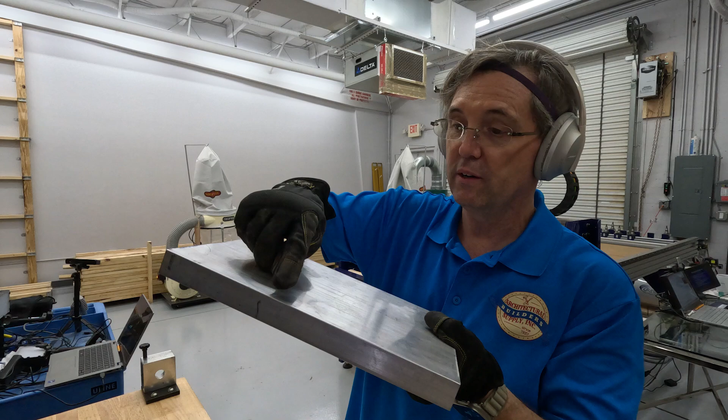I said, well, I can make it for you on the CNC machine. He says, yeah, send me a quote. So, needless to say, we got the job. I'm going to turn this 1-inch solid block of 6061, 8-inch by 12-inch, into 4 individual pull handles, and that's what this video is about. I hope you'll watch as we go through the journey. Unscripted drama is guaranteed. Success, not so much, but fingers crossed. Let's move on.

Okay, let's tap some holes here. This is a 1/4-20 tap specifically for aluminum.

Yeah, tapping holes is... you know what? Obviously I could have put this tap into the drill press, but I've never done that before, and I'm not comfortable. I don't see how that would work with a bottoming operation.

A little bit of resistance there, so I'm going to back it off, clear out the holes. Yeah, chips get in there, you'll be able to tell that something's not progressing the way you like. You get any twist at all, it's definitely time to go in the opposite direction and work something free. Twist is the danger zone. A very small amount of twist is going to occur, but going back and forth like I just was doing is how you don't break a tap off.

Plus, what is easy about soft material like aluminum or brass is, I've drilled and tapped so many holes into the back of mortise cylinders, brass mortise cylinders. The tap is fine. I don't know how many... yeah, we're good, we're at the bottom. I don't know how many holes ultimately I'd be able to get through with a single tap. It's probably a fairly large number.

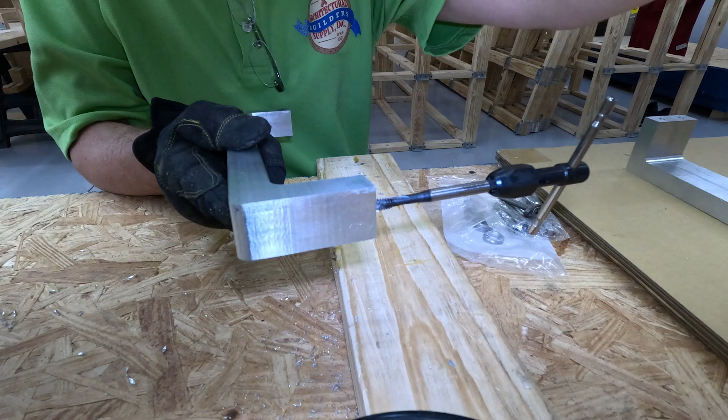Bit of resistance, back it off.

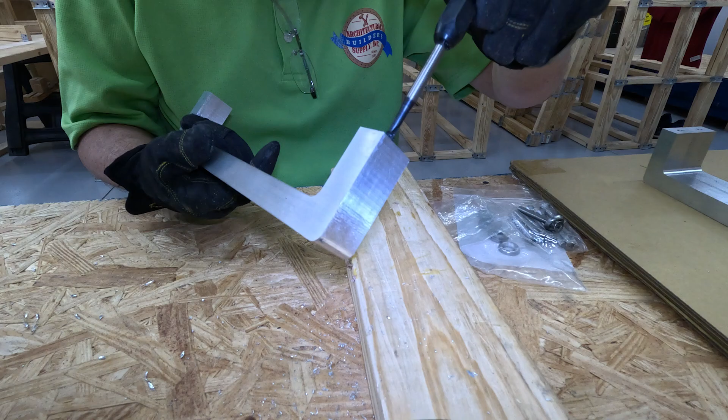Maybe what I'll do in the future is use specialty bolts, but I'll do 1/4-20, maybe a finer thread. That may be a good idea for this. I could have done 5/16 on this. 3/8 probably would have been stretching it, but we could do 5/16.

No resistance, so I'm just... well, a small amount of resistance. No twist, so I just kept going.

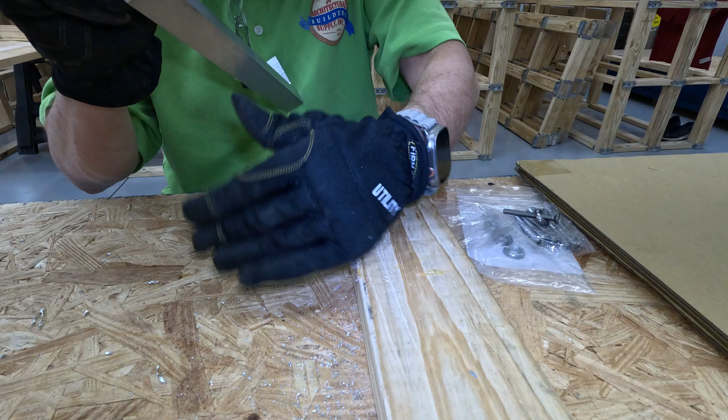He has a couple of GT40s, a Mark 1 and a Mark 2. When I was there about a month ago, there was a third, I think it was a Mark 3, I don't recall. It was on loan from someone.

He has an incredible collection of hood ornaments. Cars in the 20s and 30s, a hood ornament was quite the thing. The French glassmaker Lalique, some of you may have a Lalique in your home, I know we do, manufactured some pretty exquisite glass hood ornaments.

That's interesting, if you do end up here in Naples, it's definitely one of those things that doesn't make the list of things to see for a lot of people. I think Revs Institute is what it's called. It's just like the hardware industry, we're awful at marketing. I lived here for 3 years before I learned that there was a near priceless car collection a mile to the west of where I sit at a desk for 9 hours a day.

I've been there 3 times. One was a docent-led tour. I absolutely suggest that you do it with a docent. The people that work there have forgotten more about automobiles than most people will ever learn, and they are volunteers, extremely passionate about automobiles, and it shows. They know stuff and they are really happy to share their knowledge. They're also really quick to tell you don't touch anything, as would be common sense.

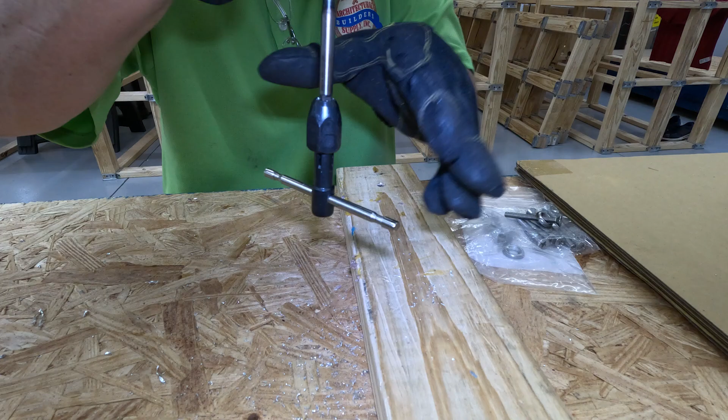There's a gift shop and back of house tours. Every vehicle in the place gets what they call exercised at least once a year. The race cars are actually put onto a track with professional race car drivers, so this material is actually put through its paces.

Okay, we have one more hole to go.

Then what will happen is this video will end, and the final videos are going to be just me drilling the 5/16 holes in the aluminum push plates that these pull handles are going to sit over and on top of. Really good there.

This combination of drill bit and tap will be kept on record, so making these in the future will absolutely be done with the use of this combination of drill bit and tap. I'm really happy with the performance, the quality of the finish.

And as I've said earlier, oh, getting some resistance there. It's always the last one that I have to be mindful of. Overconfidence is not... okay, that definitely cleared itself out. Overconfidence is what causes trouble.

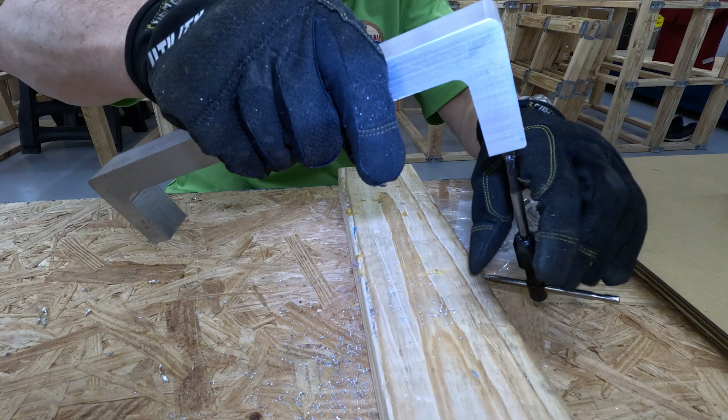You can see that blue finish on the end of the pull there. That's just going to stay there. I'm sure I've mentioned it, but these handles are just... these pull handles are just meant to be props. So there we go, we're done.

Let's pick it up with the push plates.

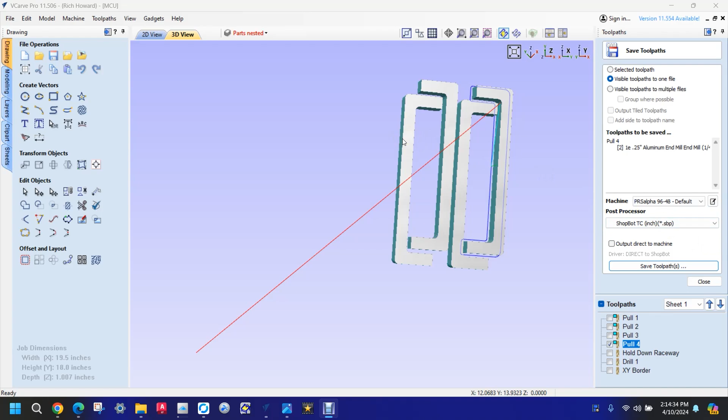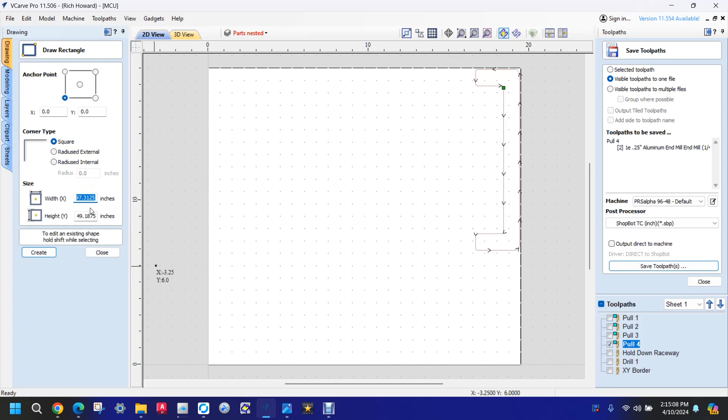Let's do that. Okay, so let's get the push plates drawn. These are 4x16 push plates, so I'm going to... what size, material? 19, okay, lower left, okay really good. So I'm going to draw a rectangle. I'm going to start in the lower left. I'm going to make my width 4, my height 16, and I'm going to create.

There it is. I am going to draw 2 circles. Center point at X2 and Y3 with a diameter of 5/16. Create. And then I'm going to put another one at 13. Create. Bingo. Close. All right, let's select all this and let's move to a layer, a new layer.

Let's call it plates. Okay, go up here. Here we go. Okay, so I drew the background, the plate itself, just for reference. That's not going to end up being a vector.

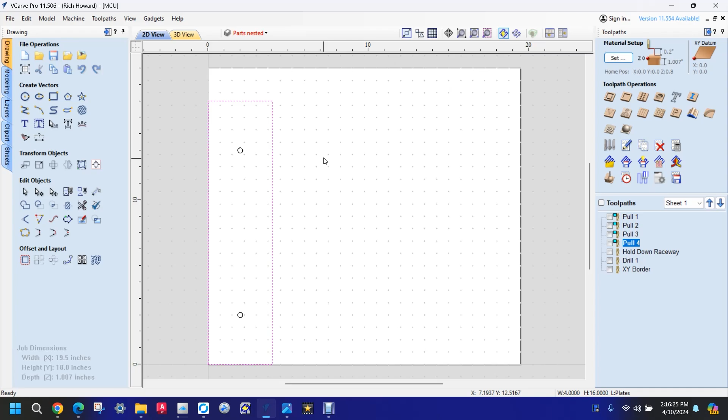What I want to do is actually put a tape measure on my plates and make sure that they're 4x16. So we're really good there. The reason that the holes are 5/16 is because my bolts are 1/4 inch.

So let's get both of our bolts, and let's do a pocket tool path. This plate is 50 thousandths, so I'm going to go 0.06. We're going to go into our material below.

That's fine. Let's select a bit, and I don't know what — I'm probably just going to use the 1/4 inch bit that I have, the bit that we have been using, I should say.

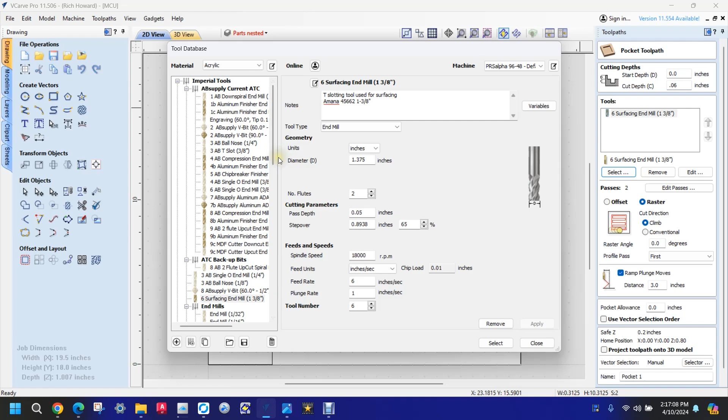Let's see if it's a 3 or a 2 flute. It's tool number 2, and that's a 2 flute. Yeah, this is the 1E. It's been 2 weeks since I've touched this, so it's one of those situations where I just don't recall. I need to make these videos without stops. So yeah, that's our bit, a 752.

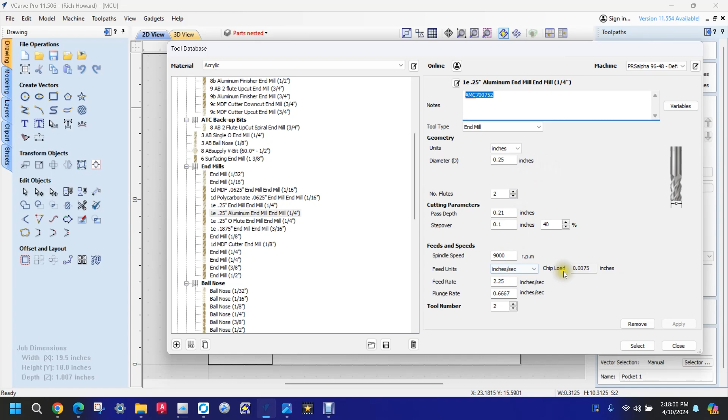It's an uncoated aluminum 2 flute cutter. Our chip load is what I like. None of this has changed. It is tool number 2. Select. We're going to get rid of the surfacing end mill.

Plate. Yeah, we'll just leave that. It shouldn't be a problem. Let's calculate that.

Okay, so let's reset the preview. Let's check our material thickness. Yeah, it's changed. Obviously 0.05. Actually, let me put the caliper on that. Going 0.06 is going to certainly get through it. Yeah, this material is nominally 50 thousandths, and if it seems like I'm rushing through this, it's because I marginally am.

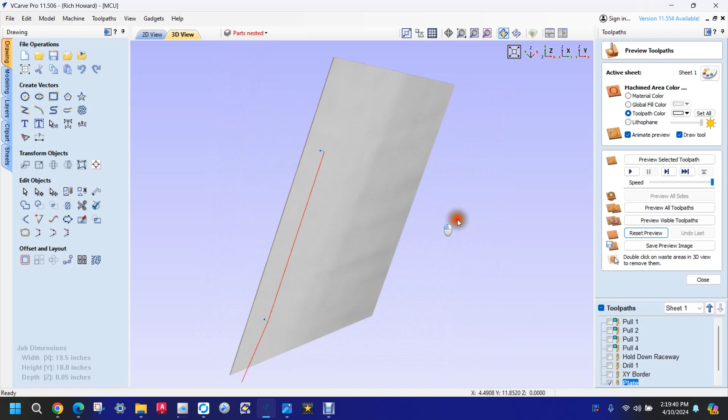Okay, so okay, you know what? Let's cancel that. I won't change the material setup, because the reason that I would change the material setup is because it would show me going all the way through. I won't know that I actually am, but that's okay. Let's preview this toolpath.

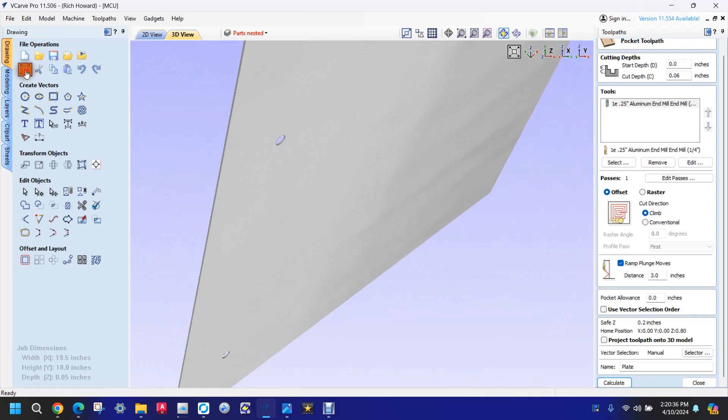I have to admit I don't know where it's getting that thickness from, because we didn't change it here. Oh, we did change it here. I just didn't recalculate the tools. That's why. That's okay, you can change the material thickness and not recalculate.

So, yeah, we're going all the way through. That's because we're going 0.06 with our finisher and suitable vectors. We calculated, but I will do it again. Calculate. Yes.

Close. Save that as a tool path, our number 2 bit. Yeah, okay, save the tool path. Plate. Okay, let's save it. Now, so what I'm going to do is actually just now get the machine set up.

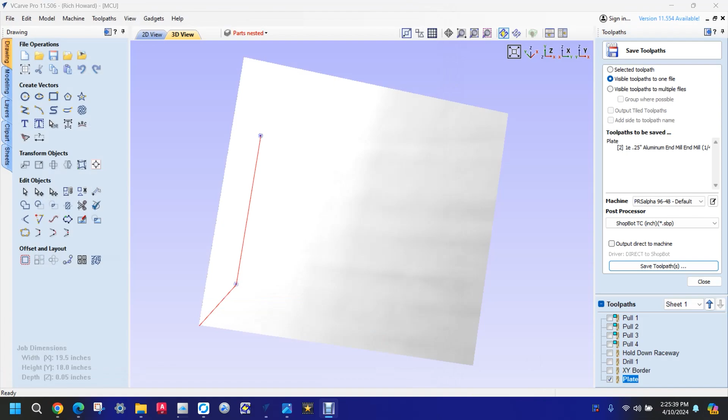Obviously turned on, zeroed, spindle warm up, and we'll just finish this job.

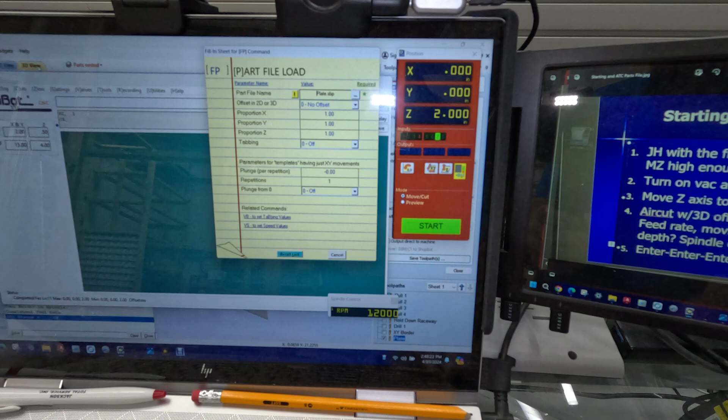We're going to pick it up with our first cut coming up next. Okay, we're going to run it. The warm-up is done, let's just run the plate, and let's just see what we break.

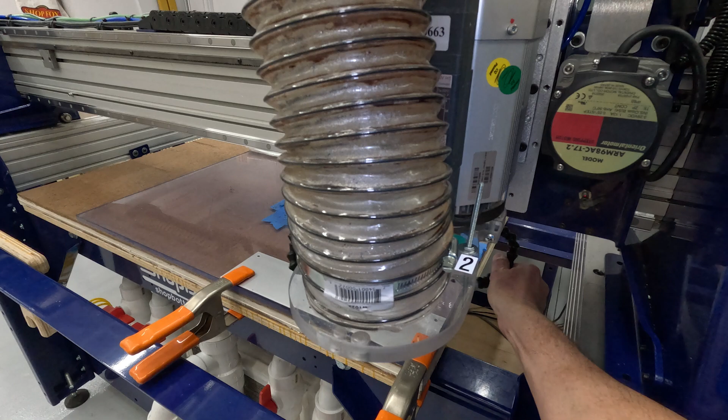Yeah, I'm going to move the cold air out of the way because I know we're going to bottom out and hit something. Cold air.

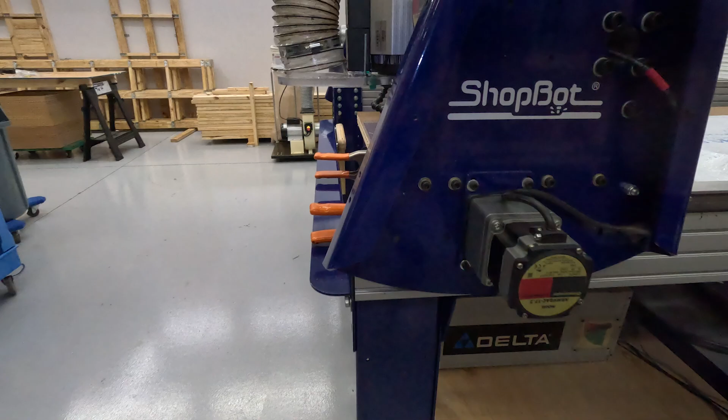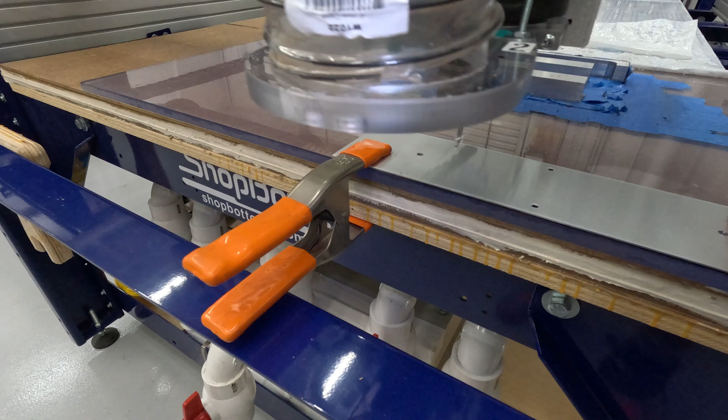Okay, let's get the board. Yeah, our clamp move. Yeah, our fixturing move, something like that. Okay, so let's go back to the lab on the fixturing.

And I'm happy with the finish, the cut. The cut's fine, even though it moved, as you saw. We're going to have to get some extra clamps on there to hold that all down. So we're just going to keep moving through this.

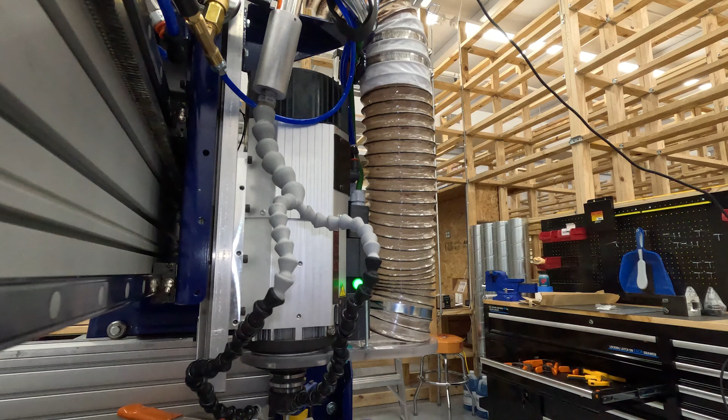And as with all things CNC, it's always about the fixturing. So let's run this again.

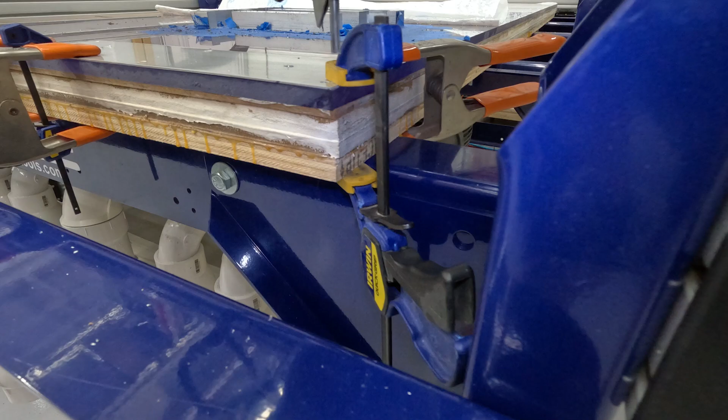Okay, alright, so yeah, alright. Let's take that off the table and let's take a look at it. Let's just try to remember what we've done.

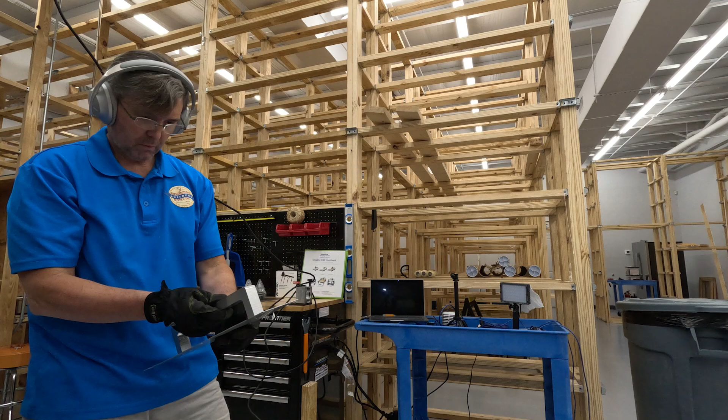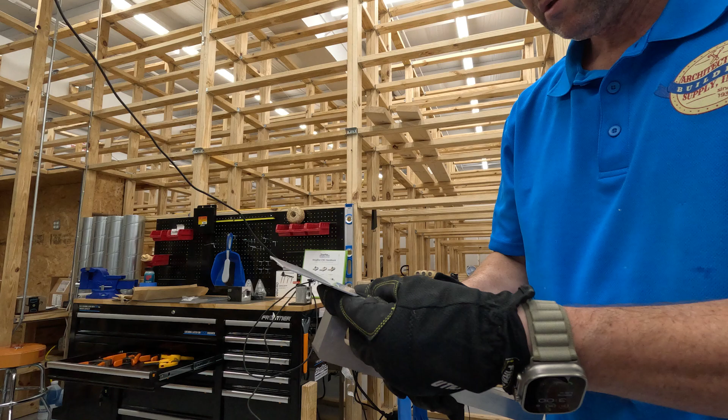Okay, we've recut that. It moved, the holes got a little bit odd on us when the piece moved, so let's grab a handle. What it's going to look like. The important part is the holes in the back are going to line up just fine.

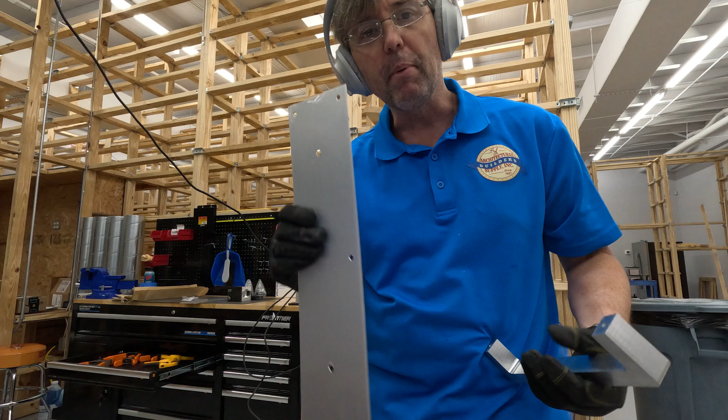So what we'll do is we'll clean off the burrs ever so slightly on these plates, and let's just run the rest of them right now. But what I'm going to do is change the diameter to 3/8 on all the holes. This 5/16 is only giving me a 32nd around everywhere, so I'm going to do that, and we're going to keep on keeping on here is what I'm going to do.

So I've got the tool path pre-calculated for 3/8 diameter holes. I'm just going to get the next 3 plates and we'll run through it.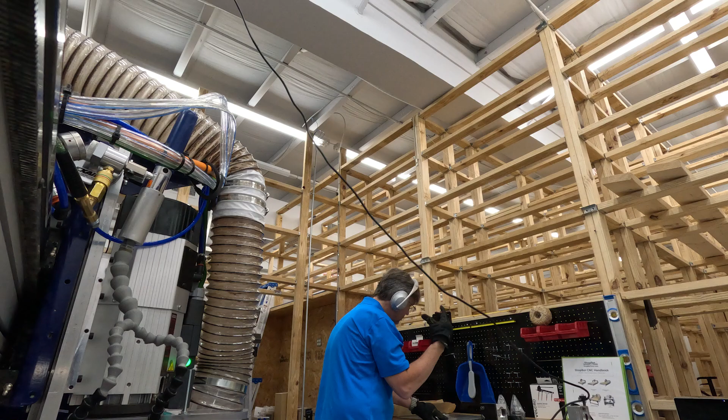More fixturing happening on here than I would really like, to be frank. But it's life in the big city.

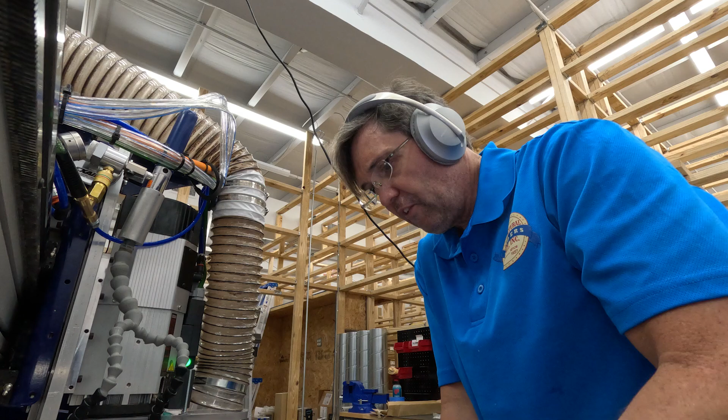Right there. More than I did expect. I wonder if I didn't have both of the vectors selected in my tool path.

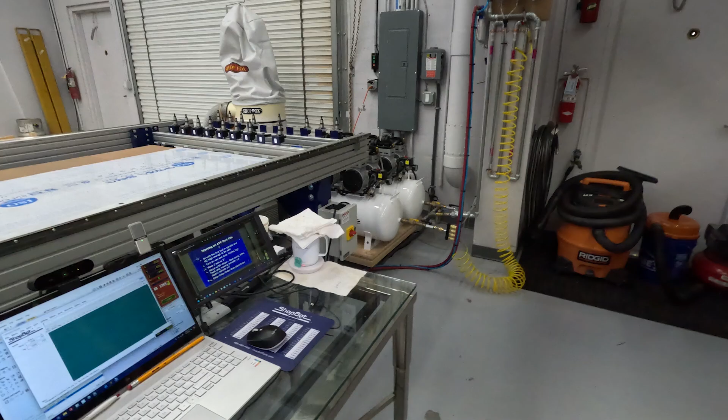Maybe you can see what's going on there. Let's check our tool path. I've got 2 holes.

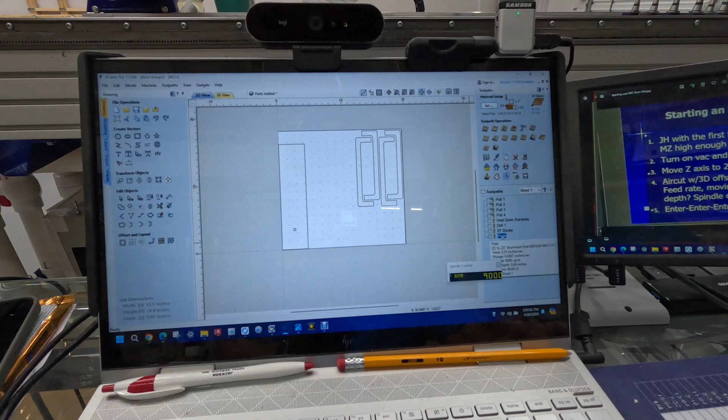Quantity of passes changed, and that's... that's a really wise idea, except we gotta fix some stuff here.

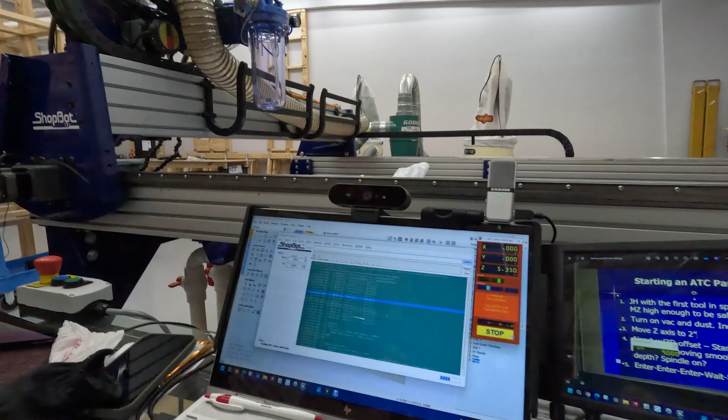Like the gloves on, sometimes the hands move before the brain thinks. Yeah, that's horrible, that's what I was expecting.

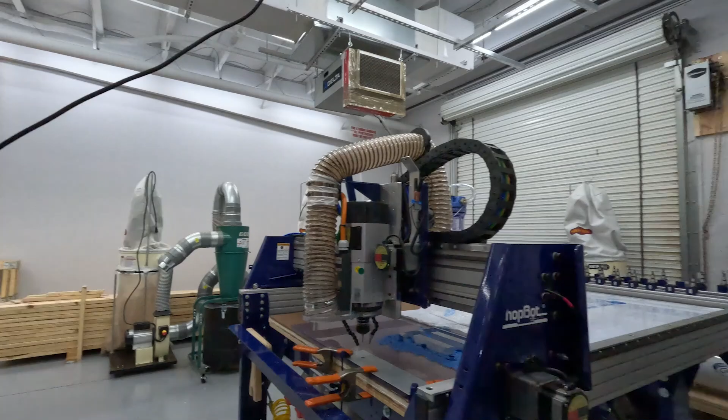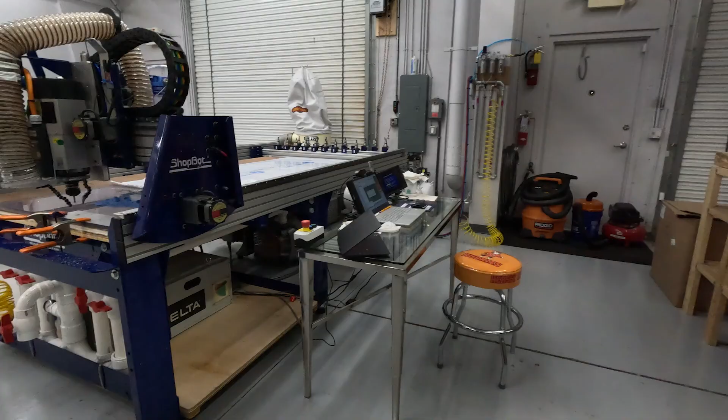That's way too big. Way too big. Oh goodness. That will cover, but it's way too big. That means the tool pathing was set to 3/8 radius, and not 3/8 diameter.

0,0,2. Move our tool back, let's correct our tool pathing. No, radius is good.

Because I changed it to on the line rather than inside the line. That is definitely the mistake that was made. You want to be inside the line. Close. Save. Save tool path.

We've got it dialed in. Let's swap out our plates and let's just keep going.

That one hole that's 5/8 diameter is not a problem, because the pull handle is large enough to cover it, and that's just how that's going to be.

Recut this one again.

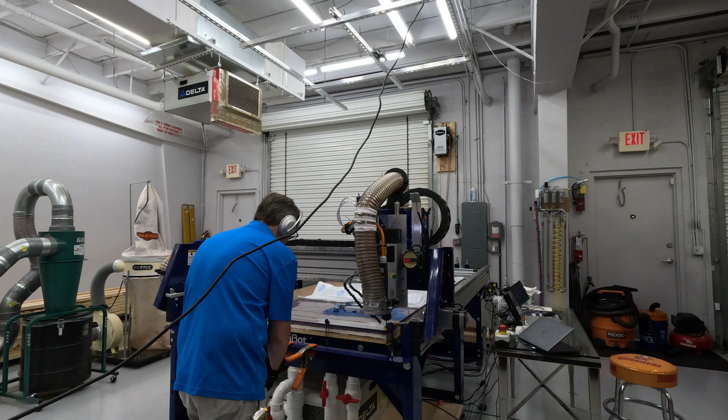What I just did there was turn off the vortex tube. You'll notice the compressors will turn off, right there. When the vortex tube is on, those compressors don't turn off, but they blow a lot of cool air.

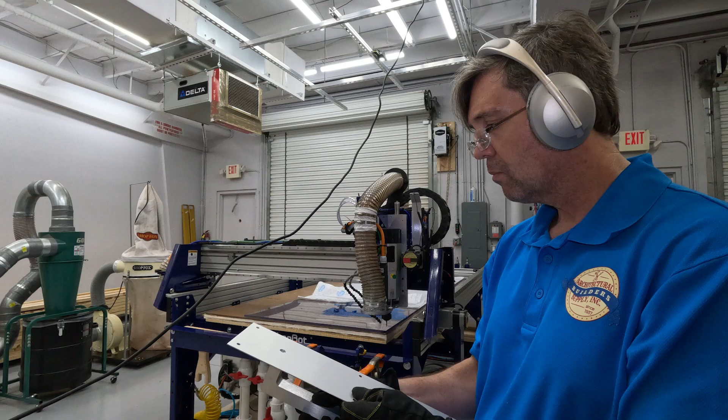Alright, so yeah, we're in really good shape. Holes line up where they ought to, and that's what this finished pull is going to look like.

Actually, let's take this just one step further. I believe we can. I have some machine screws and some fender washers, and we'll attach the pulls to the plates.

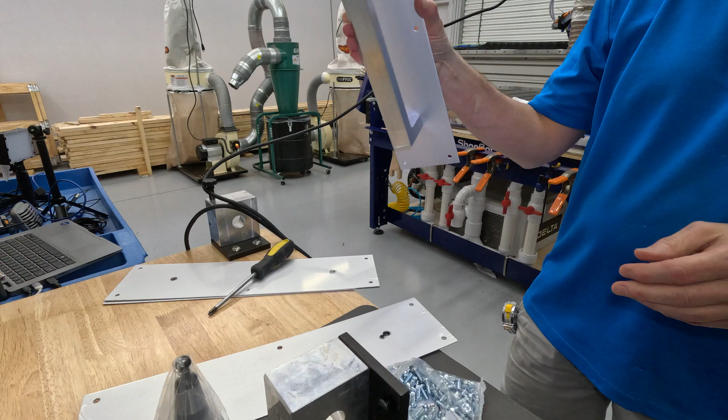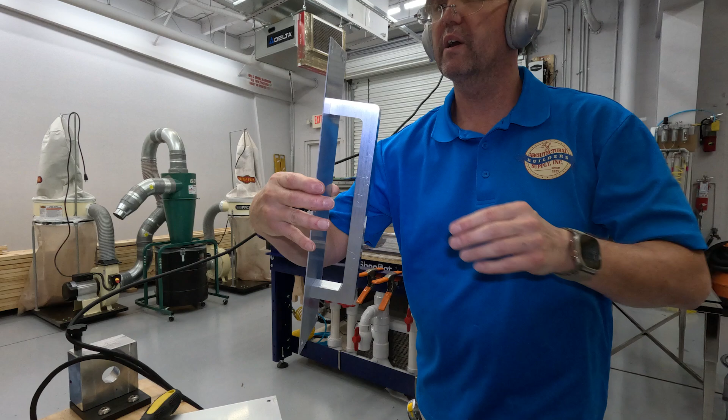And then we'll know exactly how these look. We'll know exactly what these look like. There you go. That's what the finished plate looks like. It's nice.

Gonna want to break these corners next time I do these, obviously. Put the rest of these on here.

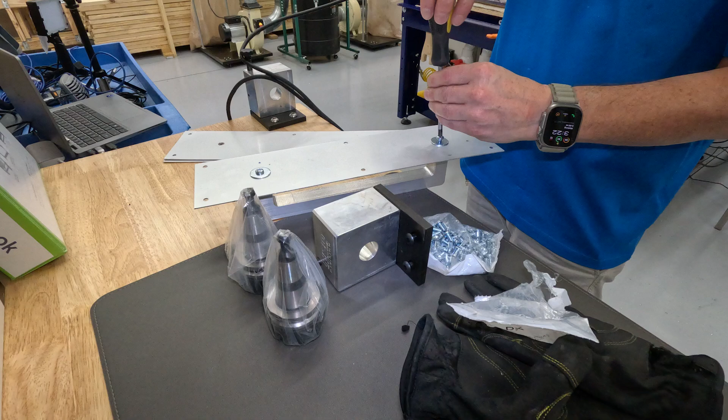There we go. Second pull handle.

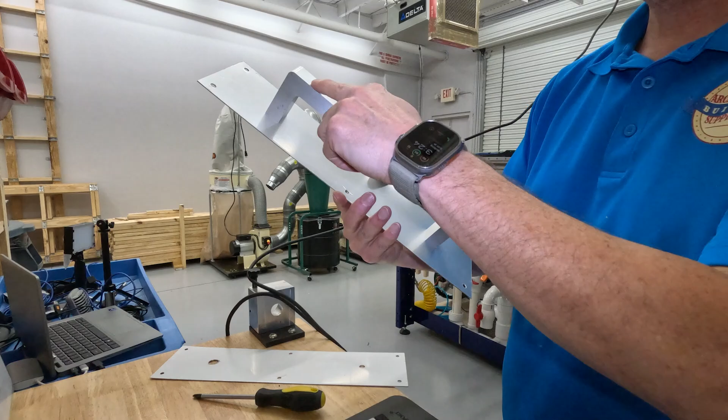Here's our third pull. This third one's got the best finish on the outside, and I think it's because I was using a coated bit on that one. Last pull handle to put the plates to.

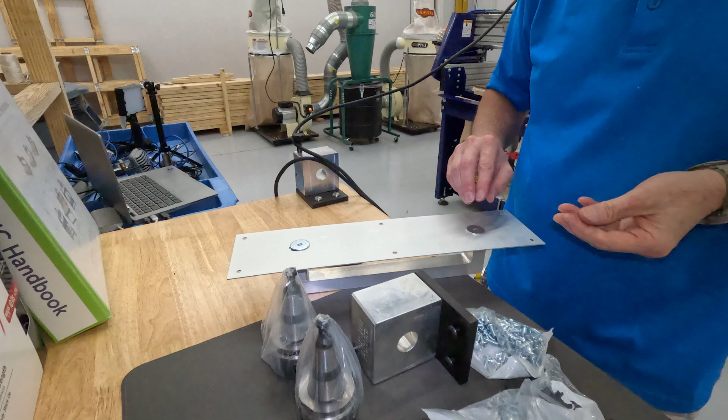The client is in quite a hurry to get these pull handles, so we're just going to let it roll.

There's our last pull. Let's lay all four of these down on the work top here. And here is our completed project.

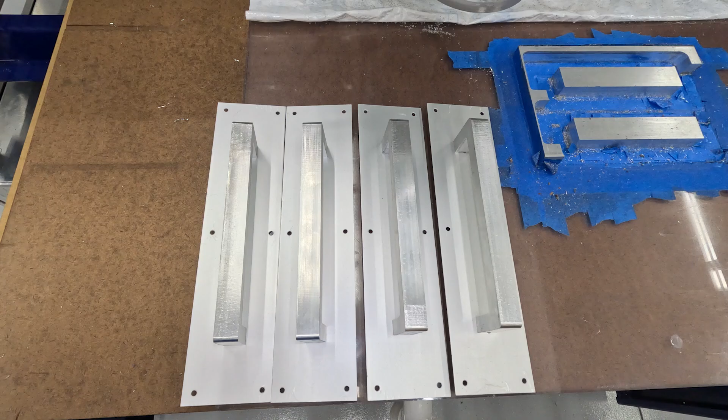They're not awful, but we'll summarize right now, and we'll talk about how they'll be better next time. I still have the original material on here.

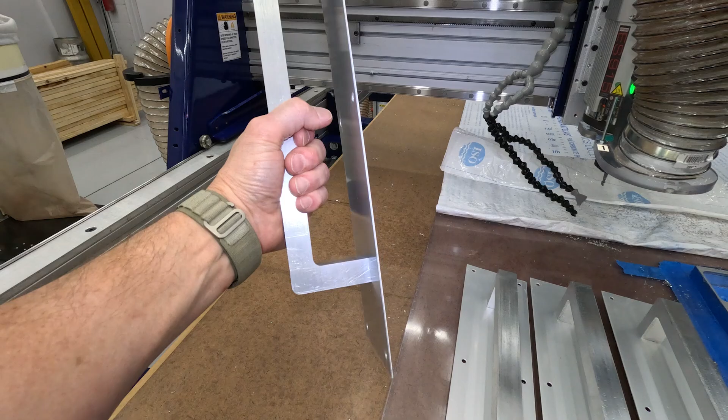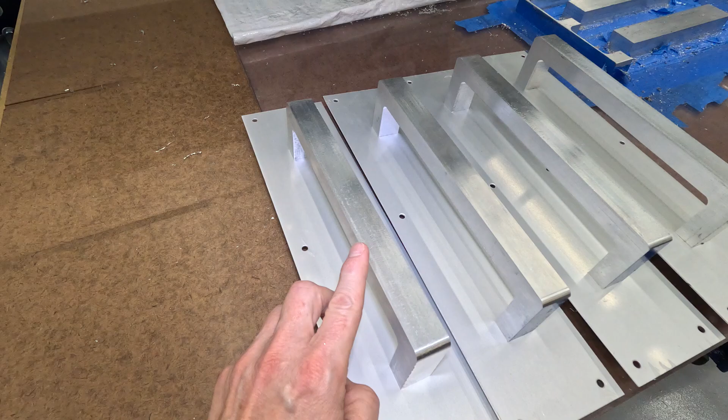Gonna need a little break on these edges. Gonna need a router table for that. That'll be our next level of experimentation.

Alright, let's wrap up this project. So, at the end of the day, the pull handles aren't awful, and that's the finished job right there. 1 inch by, I think, 3/4, right?

10-inch center to center, backed down to a piece of 50 thousandths aluminum, just a typical push plate. There will be through bolts, or a type 1 mount is what these will be. Fasteners for the push plate are included.

And so how to make it better next time? For sure, getting the fixturing on the table really well.

This is where my piece, after I went through the masking tape and the CA glue, I had to put that piece back down after I had already created the tool path. And I was within 30 thousandths of an inch of my bit touching the bottom of this. Bottom line is that's the bottom of the pull handle, it won't ever be seen. Because time is of the essence, that's going to be fine.

So how will it be better next time? I have ordered a crosshair laser for my Z-axis, so I'll be able to get the position of that bit better moving forward. That'll be number 1. Number 2, I've learned that the blue tape and CA glue really works, so I shouldn't have to put down a new piece of work material without making sure it's right on the money.